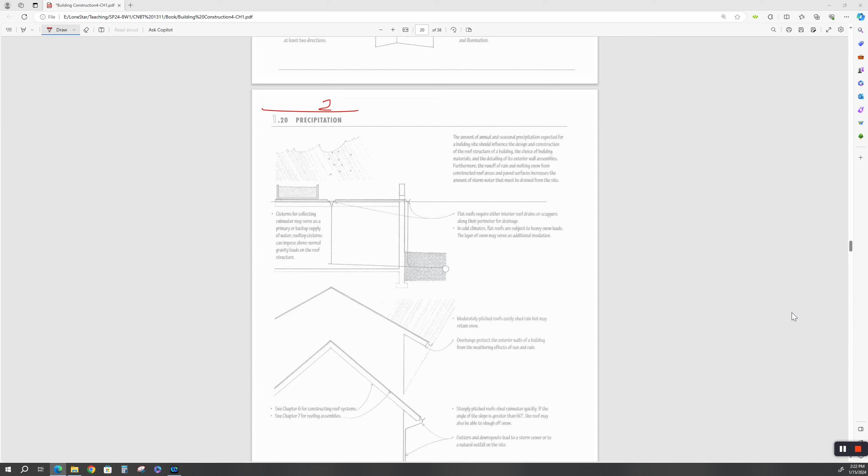Hello, CNBT 1311 again. This is part 2 of the chapter 1 video walkthrough. We left off with precipitation. If you'll remember in chapter 1.1, we talked about lighting, and left off with direct lighting coming into a house, bouncing off the walls and stuff like that. All right, let's go over here to precipitation.

Precipitation is rain, and we get a lot of that down here on the Gulf Coast, as you well know. So what you do with it is very, very important.

A poorly designed structure, a poorly designed site that does not take into consideration rain runoff, you're just asking to be sued. I did the forensic engineering on a building that collapsed due to water ponding.

The roof drains up here were clogged up. The maintenance people did not go up there and make sure they were free flowing. And sure enough, we got one of those 1.5 inch per hour rains for about 6 hours, and it basically turned the roof into a swimming pool, and it could take no more. The structural system bowed and bent to the point that it pulled the joist off the columns, and the roof collapsed. It was a big mess.

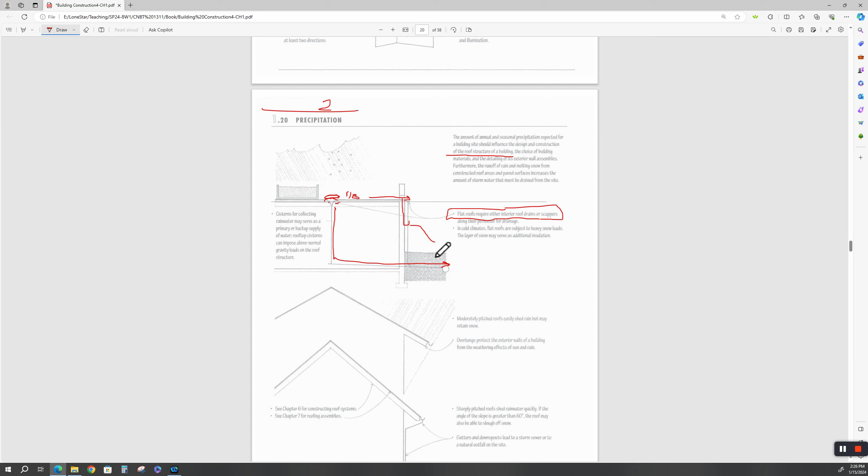So in case you do have blocked roof drains, before it gets to the point that it's overloading your roof structure, you'll have an emergency overflow that comes out. A lot of buildings will have these where they come out and they've got a spout, a spigot. So anytime you see water when it's raining coming out a wall through a spigot, then you know your roof drains up here are clogged up.

All right. So now, in the older buildings downtown Houston, they used to have a lot of these roof cisterns for collecting rainwater, and they would serve as what Ching says here is a primary or backup. They would treat them, they would treat the water.

They can also use it to water the landscaping around the structure. A lot of the old buildings in downtown Houston used to have roof cisterns.

A lot of houses out in the rural parts of the world have underground cisterns or above ground cisterns. I have a friend that's got some property out in the hill country. They don't get much rainwater, and he's got a tank, and the water comes off his roof and it collects in this giant 2,000-gallon tank.

So when he goes up there on the weekend, he's got rainwater, and they treat it. It goes to a small in-house treatment system, and if he needs to, he can buy water and have it trucked in and fill it up.

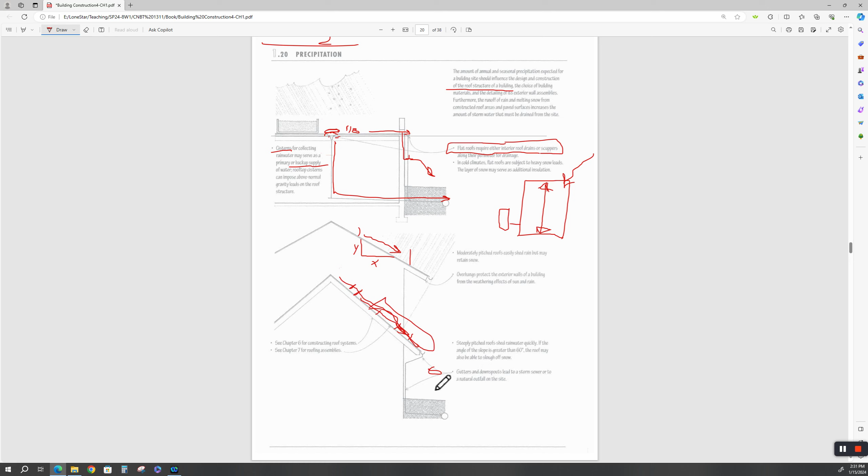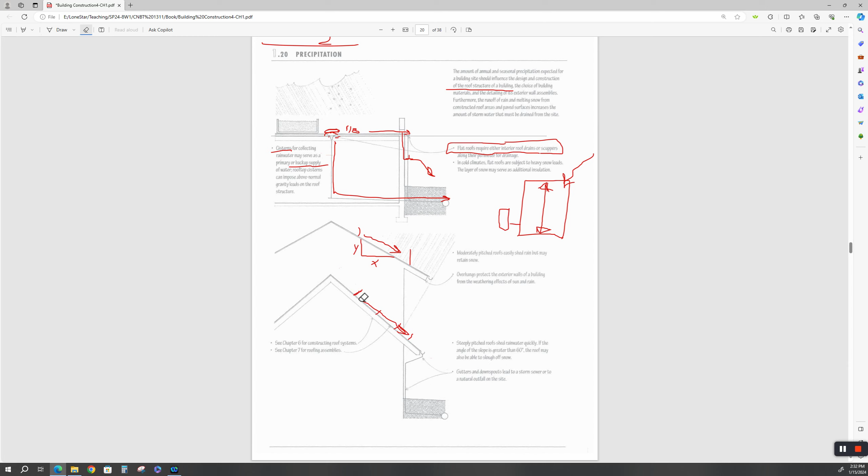All right, well, we'll resurrect this person after we've done them dirty. Okay, all right. So that's the point here, is that you got to look at the slope of your roof and how steep. So if you're in a snow area, you'll have a building code and rules of thumb to follow there. Okay, all right.

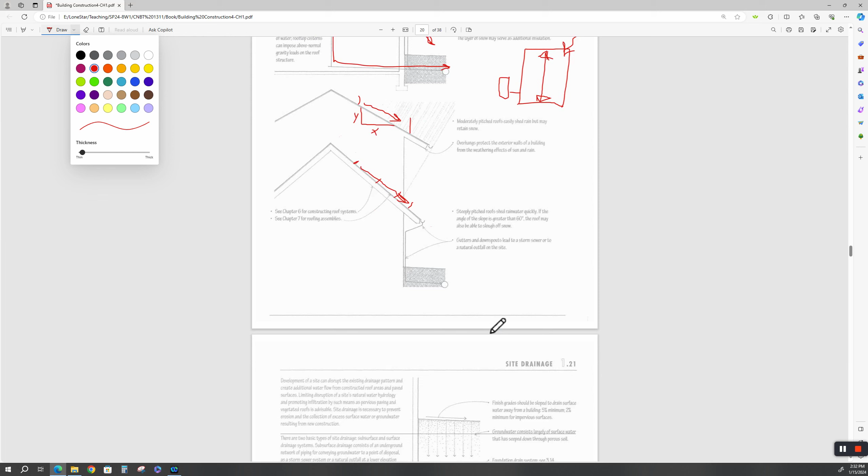And like down here, the size of these gutters, is it going to be a 3-inch gutter, 4-inch gutter, a 6-inch gutter? Okay, if the angle of the slope is greater than 60 degrees, the roof may also be able to slough off snow. Well, sloughing it off and holding it and then building up an ice sheet, if it's not insulated real well, can also give you problems. All right?

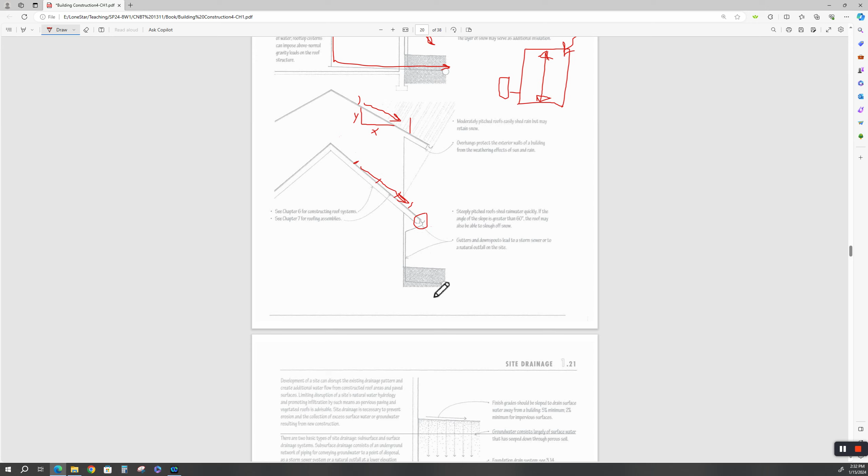All right, but all your downspouts and then your underground sewer system, if you're going to dump the rainwater in the sewer, has to be sized for the amount of runoff you're getting. Right, and that varies from area to area.

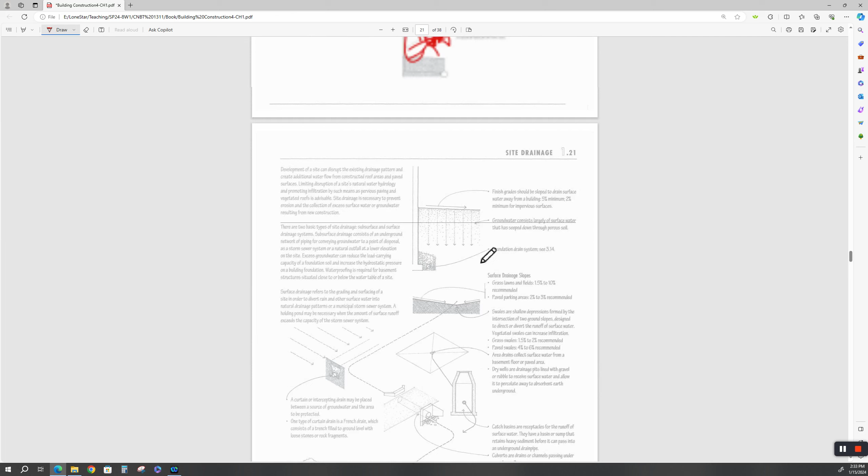Site drainage, this will get you sued if you're not careful. Where are we at over here? I'm going to watch my babbling. Oh, we're at 11 minutes. Okay, okay, I want to hold these to about 45 minutes.

Development of a site can disrupt the existing drainage pattern and create additional water flow. We already talked about this earlier in Chapter 1, about getting with Harris County Flood Control and getting a permit if you're going to develop a new site. You may have to dig a retention pond to hold some of that rain off because the bayous and creeks can't take it.

If you change the water flow on your property and it adversely affects your neighbor's property, you can get sued. It's against the law to do that, in Texas anyway.

Same with what you're building, and that's what Harris County Flood Control will look at. How much concrete are you putting down on a non-paved area? Are you putting down a parking lot? If you're going to develop the whole thing in a non-pervious covering, let's say you're putting in a little commercial building. You've got the building, you've got the pavement around it. This is going to equate to X amount of runoff. They may say part of your parking lot is going to be a retention pond, and you'll have to figure out how to park less cars.

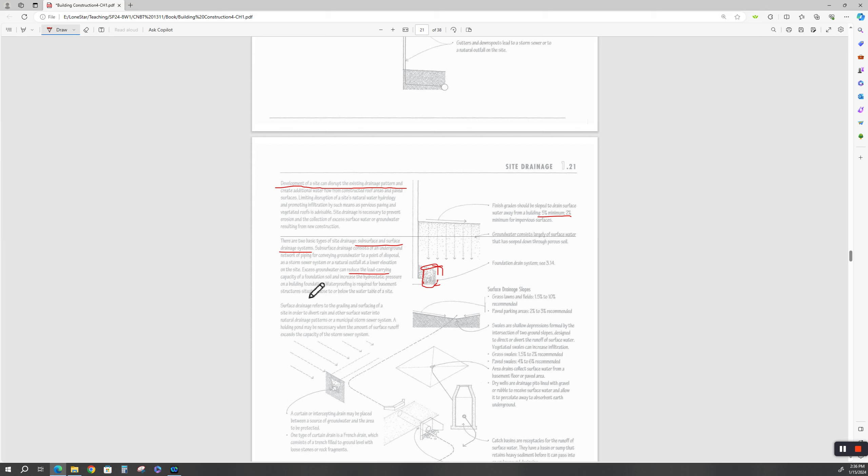You get too much groundwater, and yes, it can reduce the load carrying capacity of a foundation and soil. So again, that goes back to your soils engineer.

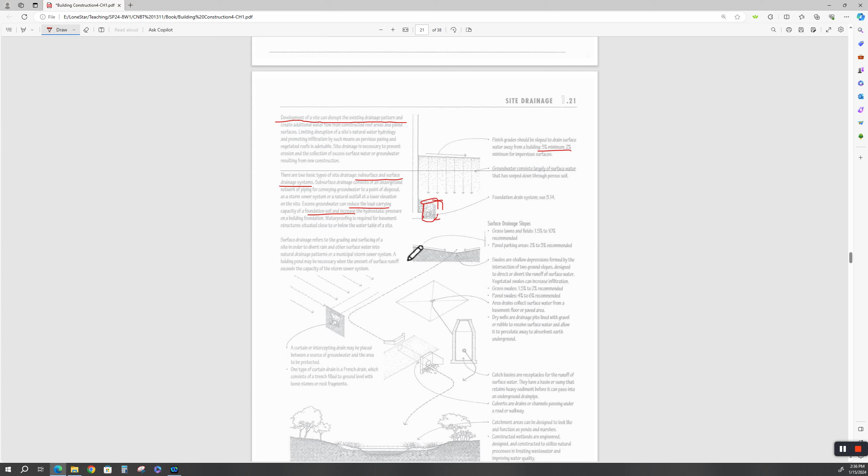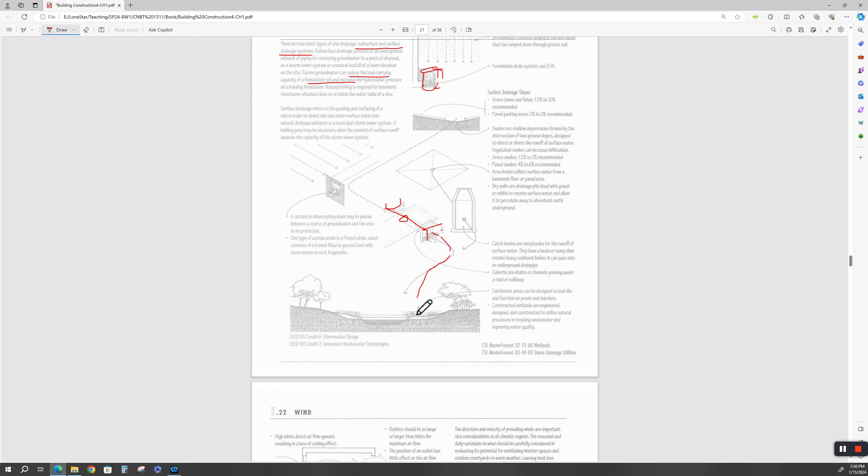Surface drainage refers to the grading. That's obvious. Area drains - down here in Houston, you will have a set of specs from City of Houston, Harris County, of the type of drains you're allowed to put in these public areas and roadways, whether it's a B-type inlet, a BB inlet, an E-type inlet, and that sort of thing, and the size of the RCP, reinforced concrete pipe. Here's a head wall - that's called a head wall. And the water would go through there and dump out into the creek or the water retention area.

Wind - we talked about wind, we talked about passive architecture stuff. Caudill Rowlett Scott, they had an elementary school that was basically a long shoebox, and they would have a high window over here on the leeward side. The leeward side of the building, College Station, back then before it was developed as much as it was - that's the leeward side, okay? And this is the windward side, where the wind predominantly comes from.

Wind side. So the air would flow through here and then rise up across and go out a smaller opening on the lee side of the school. And it increased the velocity of the air, and it helped keep air flowing in here.

And they did some high-tech insulation back then, as high-tech as they could. The foam technology hadn't been developed as well as it is today. We have some excellent insulating foams now that are not formaldehyde based. They don't produce cancer, and when they burn, if they get hot enough, they basically throw off water vapor. So anyhow, as long as it's installed properly.

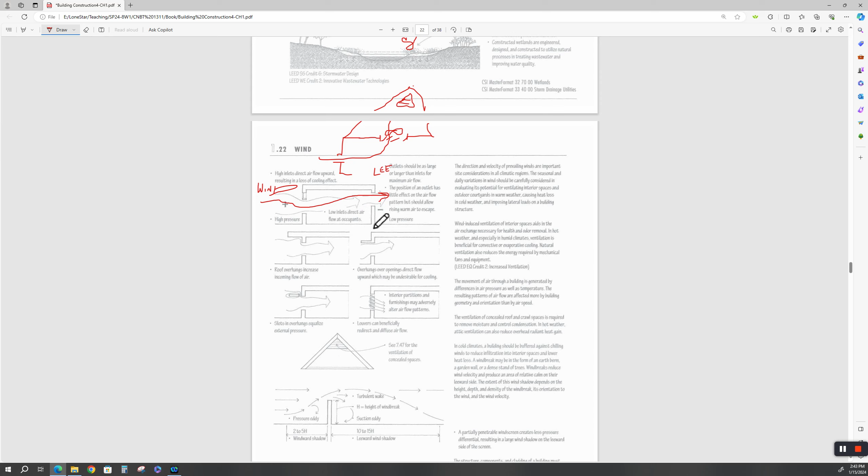Remember windward, remember leeward, wind shadow - I love it. You're out sailing and you say 'wind shadow,' you're going to get thrown off the sailboat. It's the windward side or the leeward side.

So what they're talking about here is the suction part, a pressure eddy. Right before all this air comes up over this, you're going to have some of this air that comes down and spins around, and the same on the inside - it's going to want to go to the path of least resistance. This is like an example of high wind breaks, which he talks about up here. It could be an earth berm, could be trees, could be anything to block the wind.

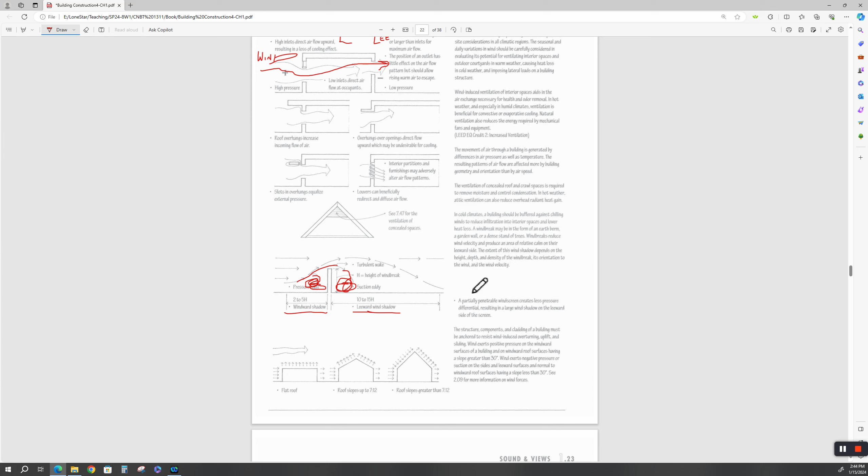So that's assuming you can orient your site to your wind. We talked about that in our site development, did we not?

Structure components - here's a pet peeve of mine. Most people don't understand how air works. Let's say the wind's coming across here. You got high pressure on this side of the wall - the wind's pushing it. You got low pressure over here. That's how a Marconi sail works on a sailboat, or an airplane wing - the air flows over the foil shape and you produce low pressure and high pressure, and it sucks you into the low pressure.

So in this case, you have wind coming across here, and let's say there's a tornado - got super high wind, or it could be a hurricane. Here's the Wicked Witch of the West on her bicycle, and poor Toto is back here trying to escape. You got high pressure on this side of the flat wall, and low pressure trying to suck the wall out - this is trying to push the wall in. And guess what happens on the roof? It's trying to lift the roof up, trying to suck the roof up.

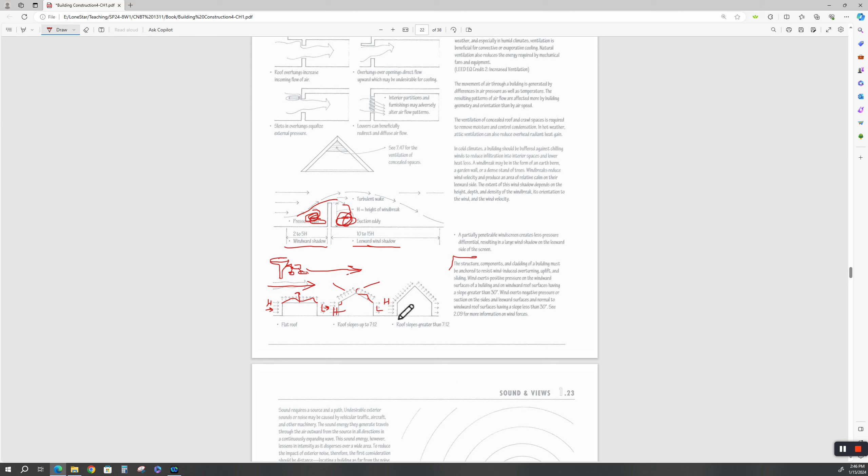Now what about super steep roofs? It makes sense, right? If this is high pressure, and the steeper the roof gets, the more vertical this gets based on its run, you're going to have high pressure up here too. It's going to be trying to push it in, and on this side you're going to have low pressure because the wind's going to come across here. It's going to be mounding up, it's going to hit this, it's going to come up over, and then it's just like an airplane wing. It's going to be pushing, and then over here it's going to be sucking, same way on the wall. Depending on the velocity, it'll start to collapse, and underneath here will be a very low pressure eddy. It'll be sucking it this way.

I'm not expecting y'all to be engineers, or to be as excited and geeky as I am over this kind of stuff. But trust me, you screw your wind loading up on a structure, there's another place for a lawsuit.

Again, remember the three little pigs. The last heavy brick house, the wolf couldn't huff and puff and blow their house in.

So everything on that building, Ching talks about it in here. He talks about the cladding and all this other stuff. What does he say about wind effects? Negative pressure or suction on the sides and leeward surfaces and normal. These are also in your building codes, depending on what part of the universe you're from.

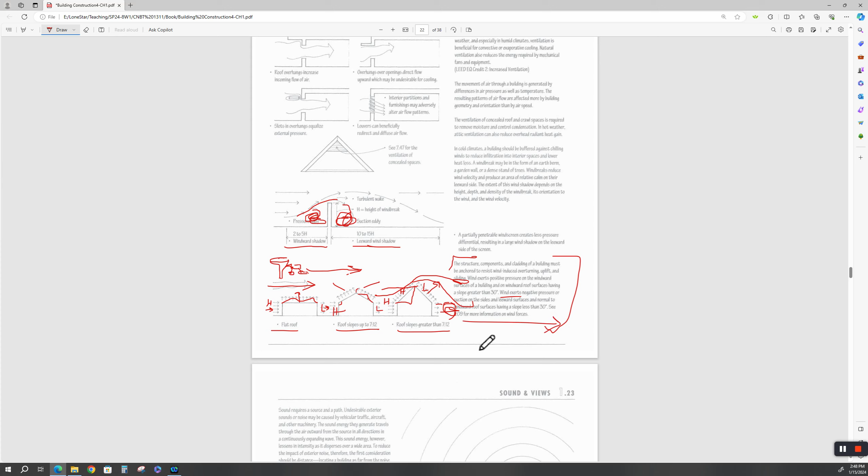Now if you're up in Tornado Alley, up in Kansas and stuff like that, oh my God, yeah, you can do whatever you want. About the best thing you can do for a tornado-resistant structure is a monolithic dome. You can go Google Texas domes, monolithic domes. They're up in Italy, Texas, off I-35, before you get to the Fort Worth, Dallas area, between Waco and that area. They're foam structured and concrete domes. They'll survive a tornado when nothing else will.

And you know, it makes sense, right? All right, now how about sound? How are we doing on time? Oh my God, we're 27 minutes. We're just looking at megabytes. 27 minutes, okay, we're fine.

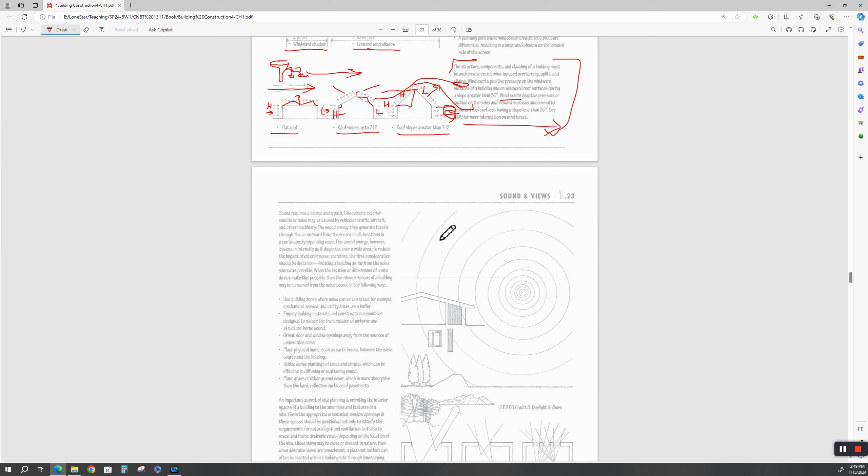All right, sound and views. Depending on the windows in the house, the type of material the house is built out of, everything has a resonance frequency of its own, a hysteresis value. How easy does it transmit vibration? And that's what sound is, vibration.

Read through this, y'all read through all of this, I'm not going to bore you and read this to you. If you can orient your building so that the solid walls are facing the most noisy part of the road or highway near the structure, well yeah, then you'll let that solid wall help abate some of that sound and noise.

You use double pane insulated windows that are foam filled, the frames, the right kind of insulation and the right kind of building material, masonry and good foam for your insulation will certainly abate the noise. The doors, what are the doors made out of? Are they solid core foamed structural doors, or are they just el cheapo hollow fiberglass exterior doors? If that's the case, then they're going to transmit more noise.

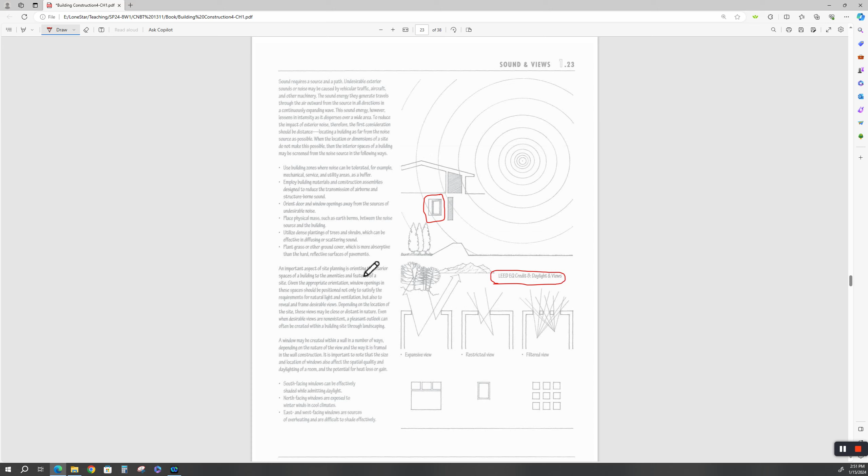And all these LEED credits are part of that LEED thing. Don't forget what LEED stands for. You're going to have the book anyway when you take the test, and if I ask a question, what's LEED? Well, you can either Google it or go to that section of the textbook, right? Again, we're not here to beat you up, we're here to get you through this vocabulary so that you can move on with your architectural design path.

A window may be created within a wall in a number of ways. Well no kidding, I've put windows in walls that were solid. I took a chainsaw and cut the opening and then reframed it for the contractor I was working for, because the architect wanted a window and he forgot to put it on the plans. That was fun.

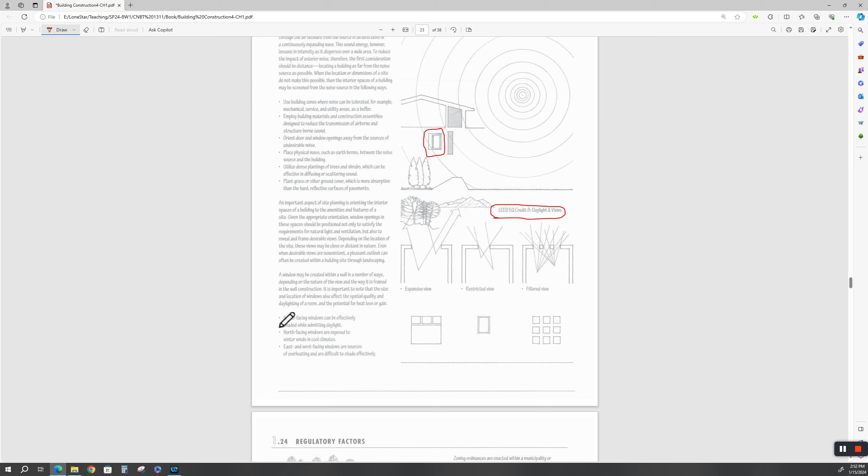Windows, how you frame them, what they're made out of, all of this affects things. Here's some good rules of thumb: south-facing windows can effectively shade. Your north-facing windows are exposed to winter winds and cool climates.

But painters, sketchers, artists, and natural light photographers like the north lighting because it's the softest light, as they say.

East and west facing windows are sources of overheating and are difficult to shade effectively. Well, that makes sense, doesn't it? Because where does the sun come up? It comes up in the east and sets in the west.

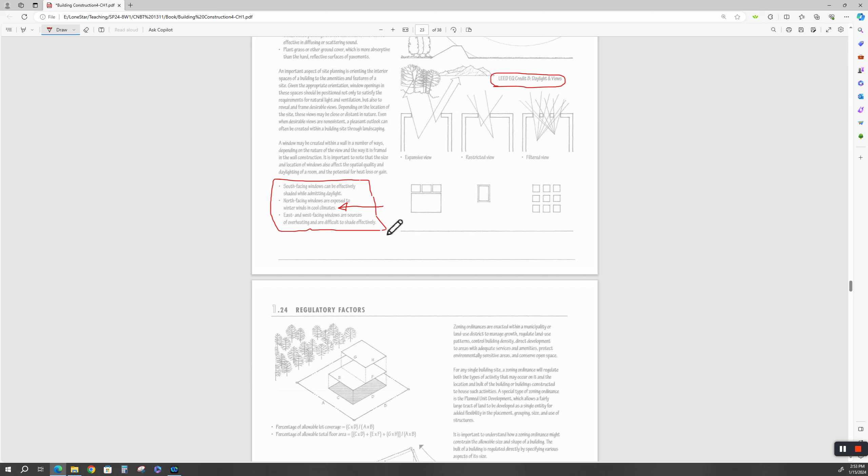So if you've got a shoebox shaped structure, you can orient it so that the smaller sides are facing east and west. Then you've reduced the heat load on two sides of your building.

Regulatory factors - we already talked about topography and flood control. Well, guess what? There is a plethora of ordinances and building codes and zoning codes that you have to adhere to. And depending on where you are in the United States, or even in Texas, you may have a zoning ordinance that will or will not let you do certain things.

Your deeds and covenants, your homeowner's restrictions - let's say 51% of the first floor, or 51% of the structure, has to be masonry, or something like that. Some say the outer facing, the back of the house, can be siding, but the front two sides have to be brick. Some say the whole first floor has to be wrapped in masonry.

This talks about how your mileage is going to vary. Do not use this as a hard and fast thing. You need to check your local code, your building code, your property code.

And if you're building a building inside something, like say the Vintage over off of Louetta and 249, if you're going to put a pad site in over there, I guarantee you that developer is going to have certain restrictions on what they want it to look like and not look like.

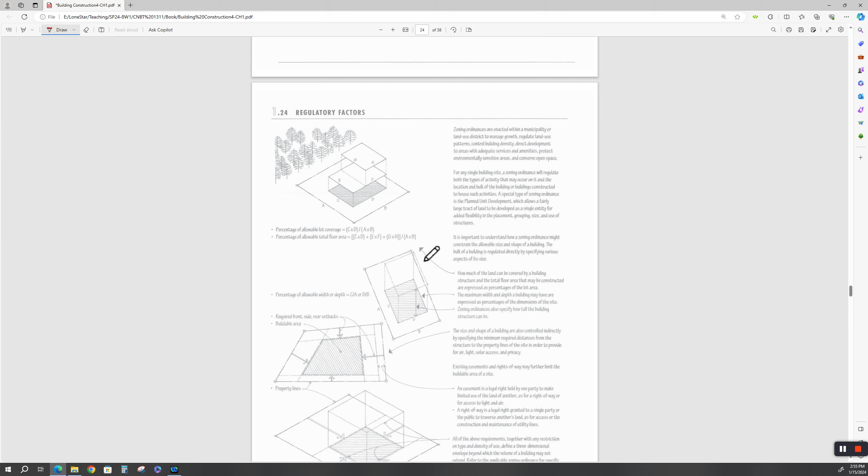Then you have to have the Harris County Engineering Code, your fire code, your plumbing code, and whatever other codes are going to be impacting your deal. Sometimes you'll have a height restriction.

A square footage restriction - so let's just say this is your building, your site, your property lines. Well, you can't put everything on that property. You've got required setbacks, and not only do you have required setbacks, you'll also have easements in here. This may be an overhead HL&P easement that you can't build anything underneath.

You may have Entex - I just dated myself, that's for natural gas. Then AT&T has their buried cables back in here, that's underground. And then Billy Bob's pipeline or something. So all of this should be on your plat.

This should be on your deed, your metes and bounds, which your surveyor should give you, your licensed surveyor. And so let's just say the deed restrictions say you have to have a minimum of 3,000 square feet - not 300 square feet, that'd be like a fifth wheel.

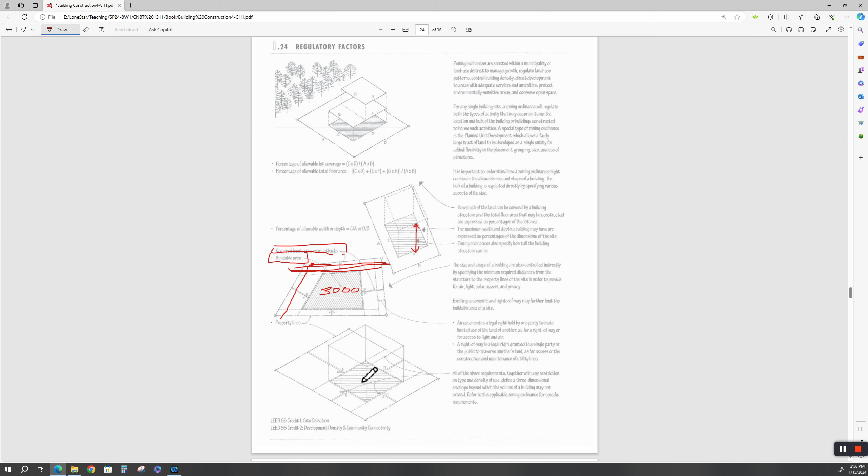And then some deed restrictions will say two-story structures must have a minimum of X amount of square feet on the bottom floor and a minimum of so many square feet on the top floor, and it may not be the same. So you might be able to get by with a story and a half or a full two-story.

Again, now you're forced to build a cube. But I wanted to make some architectural statement. Well, then make an architectural statement with your cube, because you're stuck like Chuck.

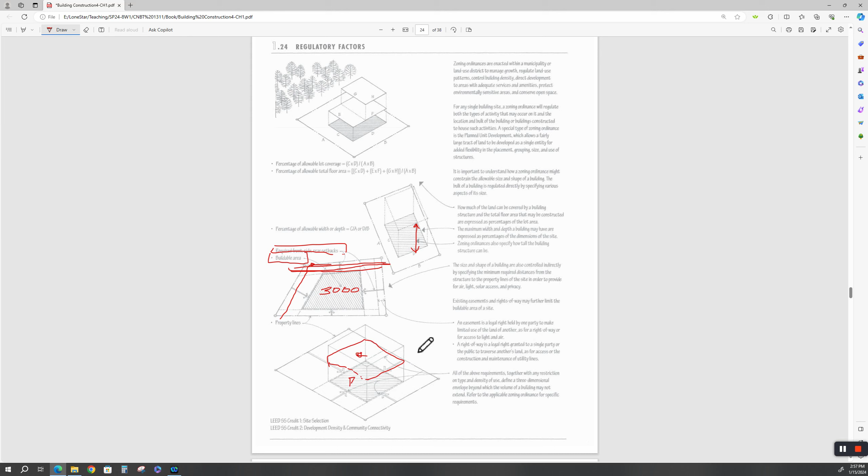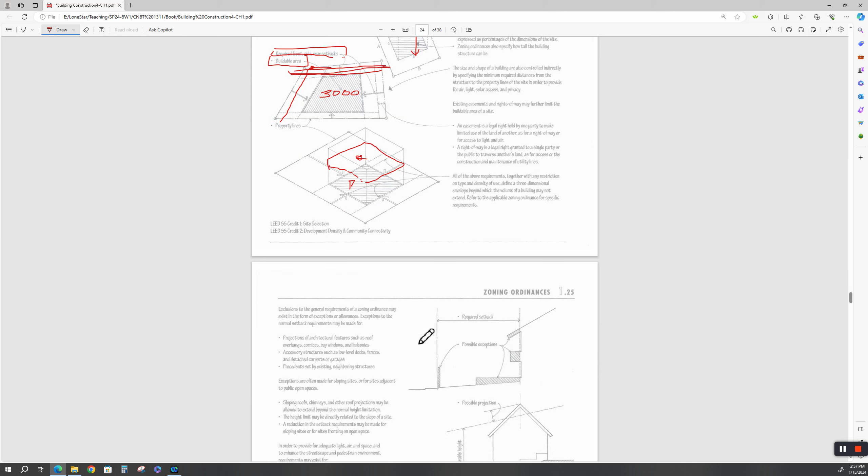Again, what did I say in the first video? It depends on how big your site is and what you're going to do with it. I mean, they're not going to let you put in a petrochemical refinery plant inside a subdivision. You're going to have to go to a place that can support that.

Zoning ordinances - we already talked about that. Possible projections of your zoning ordinance. This talks all about your exclusions to the general requirements of the zoning ordinance.

If you're up in super snow country, I bet you my bottom dollar they're going to have an ordinance or a design. The insurance companies will have a code, and they're going to want you to design that structure for the snow loading and the other stuff. We talked about allowances for heights. This talks about it here. And you thought I was making that up.

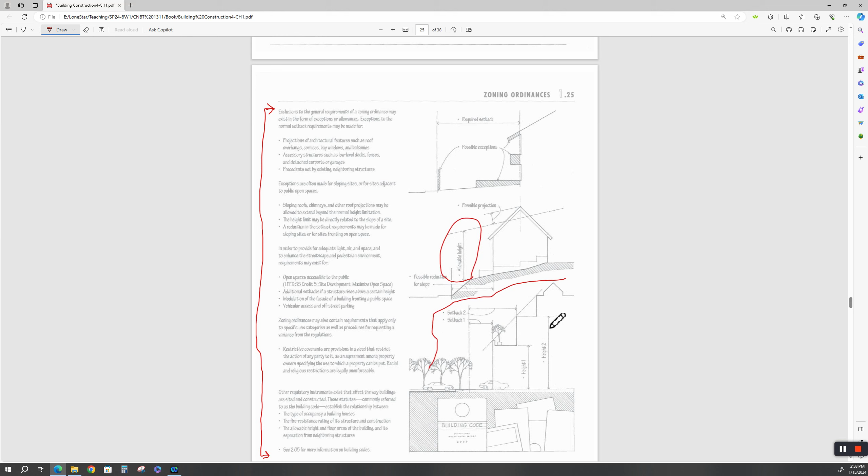All right, setback 1 can be this height, setback 2 can be that height, and there may be another setback that can be a different height. Again, these are your restrictive covenants and your zoning ordinances, and some of them even refer you back to all those LEED things. Your mileage is going to vary.

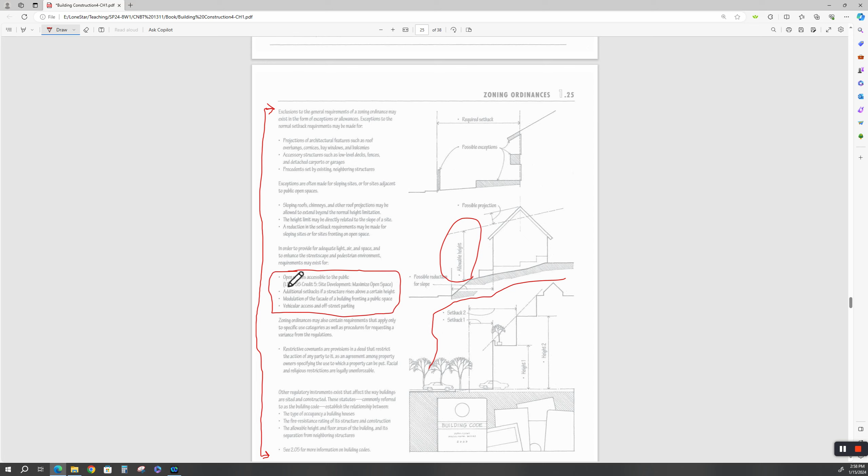Again, this is a survey course. This is to get you into what is out there, lurking in the darkness.

Site access and circulation - this is where people get into a lot of trouble. What do we mean by that? Providing for access and circulation for pedestrians, automobiles, and service vehicles is an important aspect of site planning. Now, your emergency vehicles are also service vehicles. You've seen a lot of these red painted stripes around these parking lots - it's fire zone, tow-away, you can't park here, and that sort of thing.

Big thing is, what's the population density? Let's say this is a commercial building - how many people are you going to have here, plus your employees? Where are they going to park their cars? Do you have enough room for a parking lot?

The Vintage Park Shopping Center is a quaint little place of all kinds of stuff over off of Louetta and 249. And it is a prime example of some of the poorest design parking on the planet. Sometimes it's hard to find a parking spot over there. You're not going to find it near those drive-up facilities most of the time. You've got to park out in the big parking lot out in the South 40 and then walk, which is not bad. But my whole point is that, yes, it's quaint, and yes, there's parking in front of these shops, but it's very limited in front of the shop.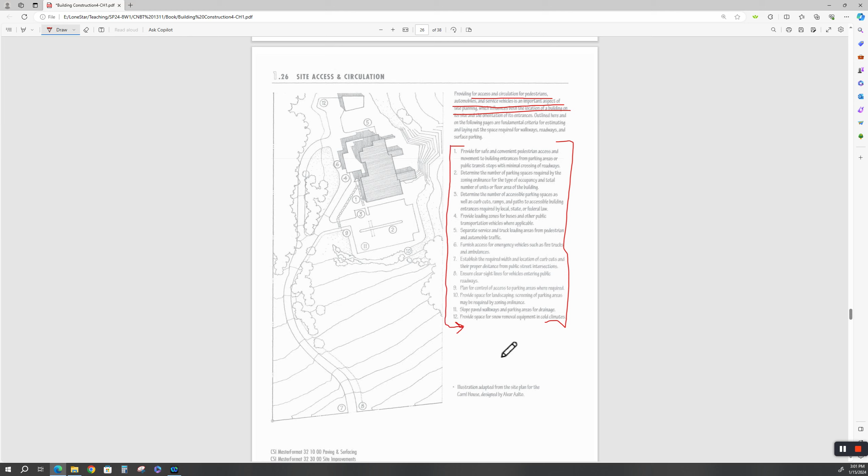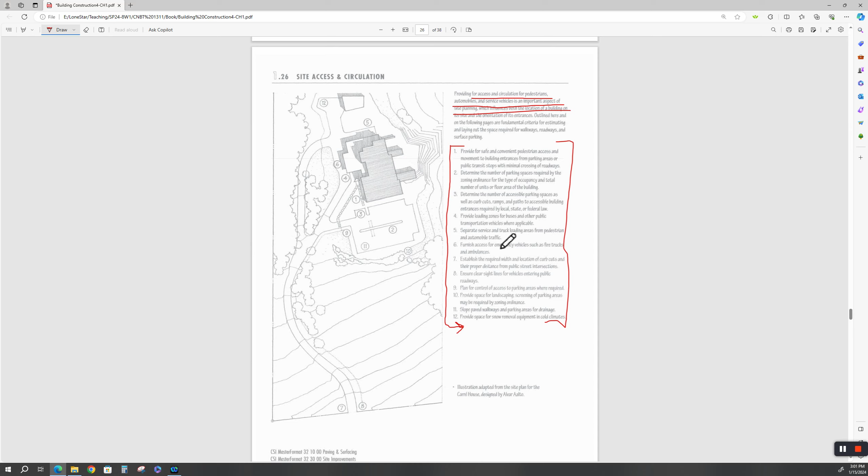Let's say this was a medical facility. Most of your employees would probably try to park back in here or something. But then again, what about service people? And that talks about that all in here. We beat that up enough.

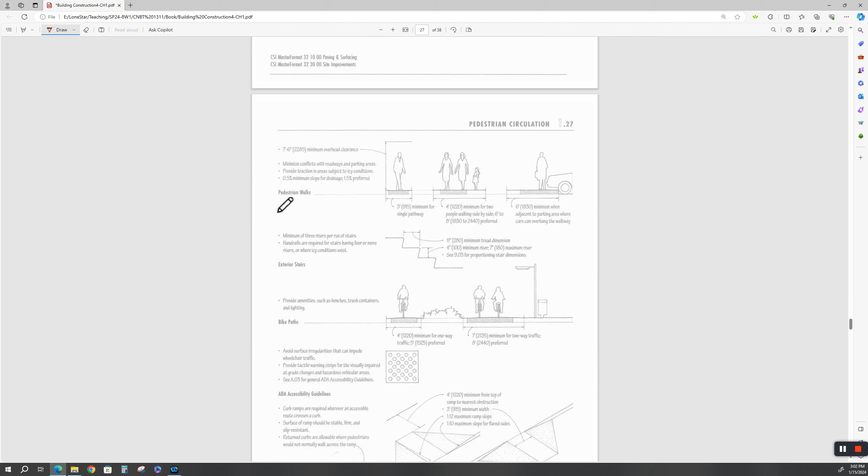Here is a good part of human factors - pedestrian circulation. 3 foot minimum for one person, 4 foot for two. That's a little too crowded for me, but I'm kind of a socially unacceptable person anyway. Side by side is really 6 to 8 feet. And then if you're going to have somebody walk and you've got these cars hanging over, another 6 feet. Again, this is a rule of thumb.

Now, exterior stairs - stairs will get you sued if you screw these up. And we'll have a whole section on stairs. You'll probably hate me by the time we get done with stairs. But minimum of 3 risers per run. Handrails are required for stairs having 4 or more risers, or where icy conditions exist.

And bike paths - again, these are rules of thumb. You may have a zoning requirement or a building code requirement in a certain area that requires something more. Seriously, when we get to stairs, y'all pay attention. We'll have some stair calculations if we can fit it in. If it was a face-to-face 16-week class, you'd be doing stair calculations a lot.

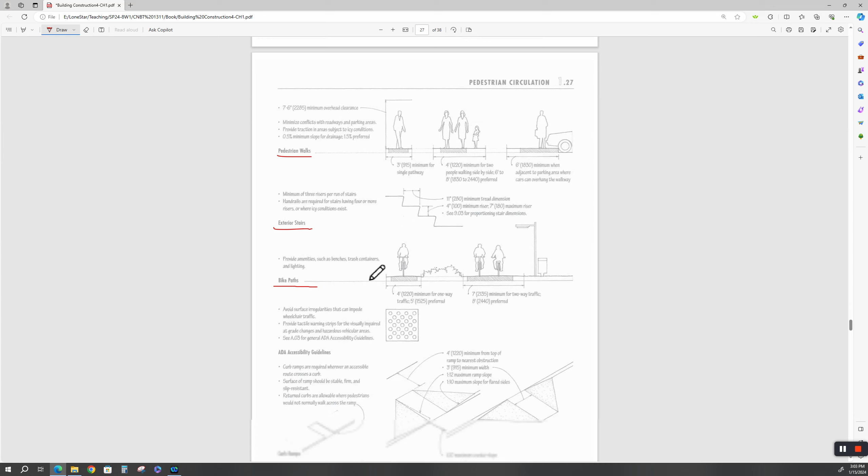That's vertical movement of a human, and how you get them to move and get them up. Those of you taking face-to-face classes out at the Cypress Center, go look at all the different stairs we've got—that big Mayan sacrificial staircase right by the cop desk, and the other two stairs on the end.

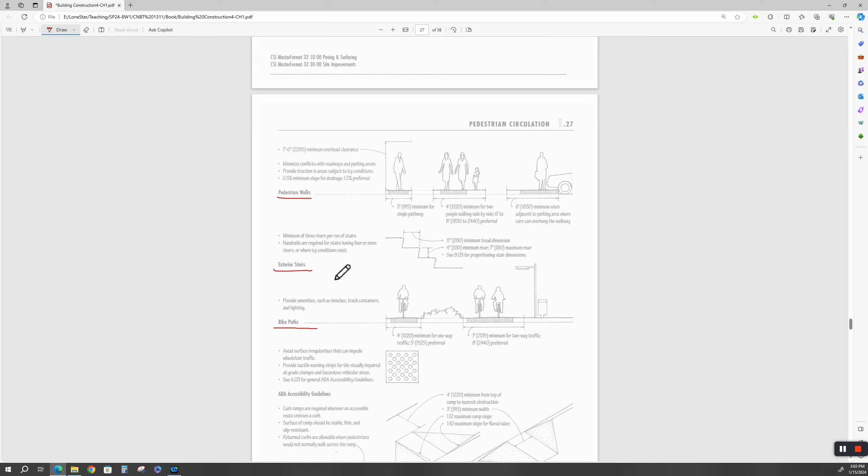Avoid surface irregularities that can impede wheelchair traffic. That's part of the ADA thing, and there's a whole section on ADA later on. ADA is the Americans with Disabilities Act, and there's a whole section of human factors on designing around ADA.

When I remodeled my bathroom at the house, I made sure that I could get a walker and a wheelchair back into the bathroom. With my two knee replacements and my back surgery, I was using a walker for a while. We were glad that we did that.

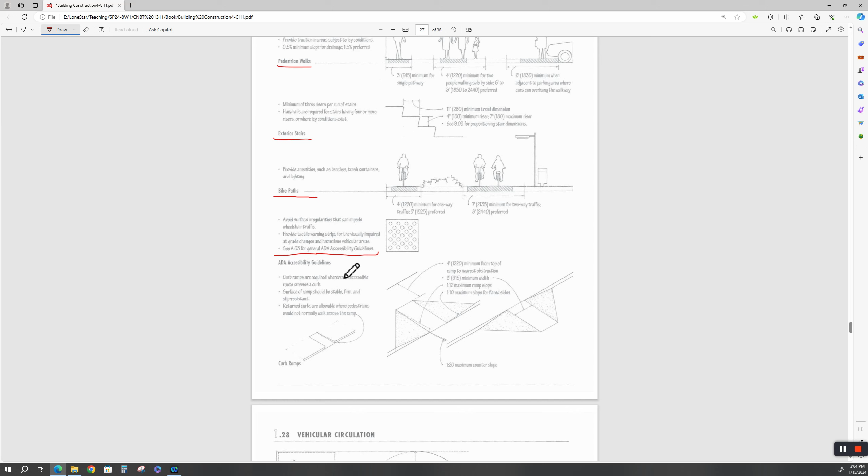Curb ramps. If you're going to have ADA access to a doorway in a building, you need some kind of wheelchair curb ramp.

You need to have the buttons where they can get to them, not out in the flower bed like at the Cypress Center main opening. They had ADA ramps going in, but the ADA button on the exterior was 3 feet out in the flower bed. Since I opened that center as the director, that was one of my first pet peeves. They had to go pour a slab out underneath the roof covering to get to the button. So the poor person in the wheelchair, if it's raining and they finally make it up, they have to go back out in the rain to push the button so the door opens. Go figure—not a very good design.

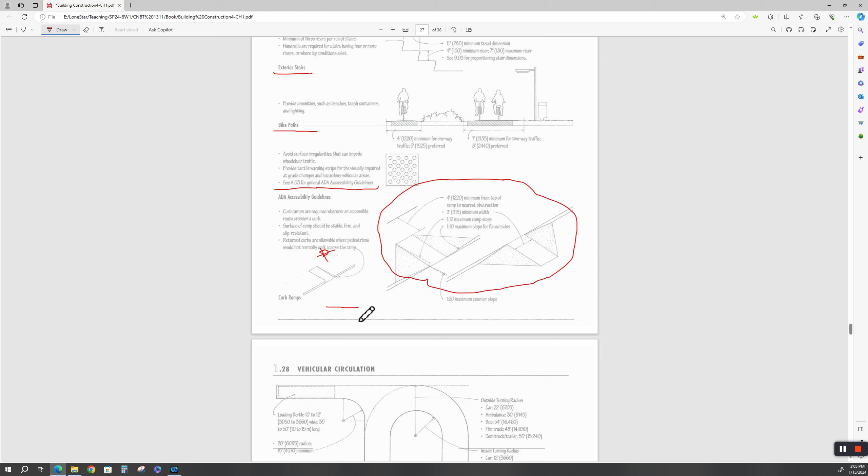All right, these are some rules of thumb for ramps. You don't want them so steep that people are out of control. A ramp is nothing more than a rise over a run—we go back to the right triangle again.

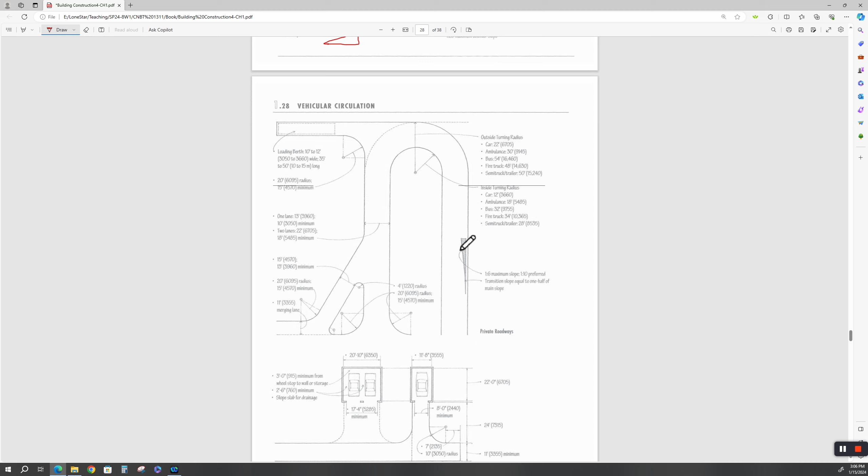Vehicular circulation—this is civil engineering. I'm not going to expect you to be a civil engineer, but trust me, parking lots—I have gotten into a lot of arguments with architects over parking lots and how to move cars around their structure. Sometimes they had to narrow their building to get the number of cars they needed in the spaces. These are some rules of thumb.

Again, these are rules of thumb. This loading berth, 10 to 12 feet wide and 35 to 50 feet long, with this radius, in my opinion, is too tight to expect a truck driver to get that in there.

Especially in this little slit here. A good truck driver can do it, but he's going to have to come in this way, get that thing jacked over to back in that way. So he may have to actually go against traffic, because having him come in this way and make that steep turnaround, he's going to need this.

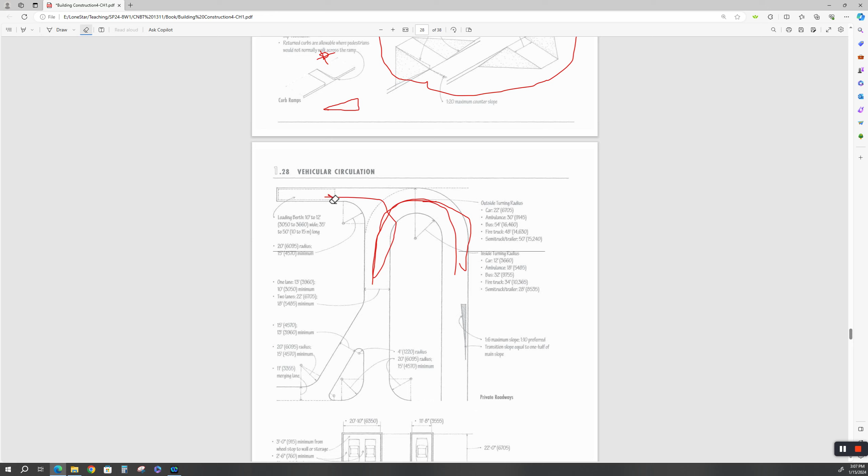These are all things you've got to consider. And I've had a lot of arguments with architects in my other life about this.

Parking lots—we already talked about the vintage parking lot. Now if it's just out in the middle of the pasture, like the big parking lots at the vintage, that's a no-brainer. They're pretty much double stacked, 90 degrees in. These get a little hinky.

Angled parking lots. Some sections of the high-rise parking garage at UP campus have angled parking slots, and you've got to watch your cross-flow traffic. You can get your cars backed in or headed in deep enough, and then get them out. But these are some rules of thumb.

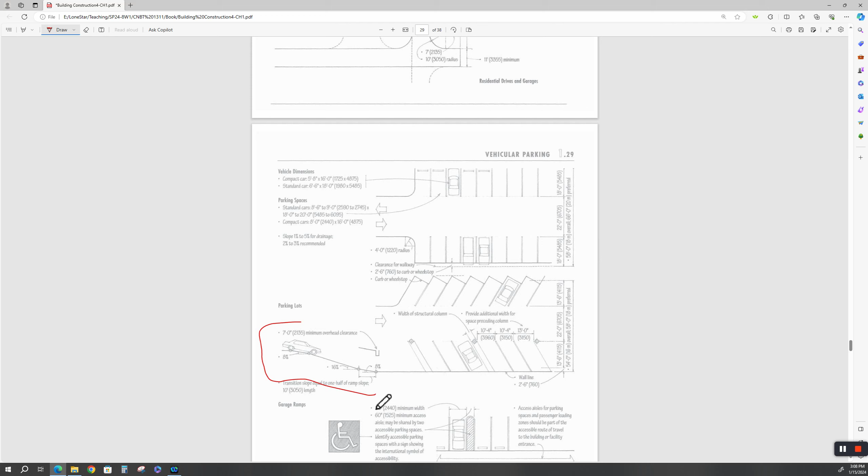Again, this is a ramp. You don't want the ramp too steep or the cars bottom out. And what is this? Well, that's a right triangle, isn't it? Yep, that's a right triangle. Look at that—that's a right triangle. Again, right triangle, and this is a right triangle. That's all slope is: rise over the run. You've got to get these angles right.

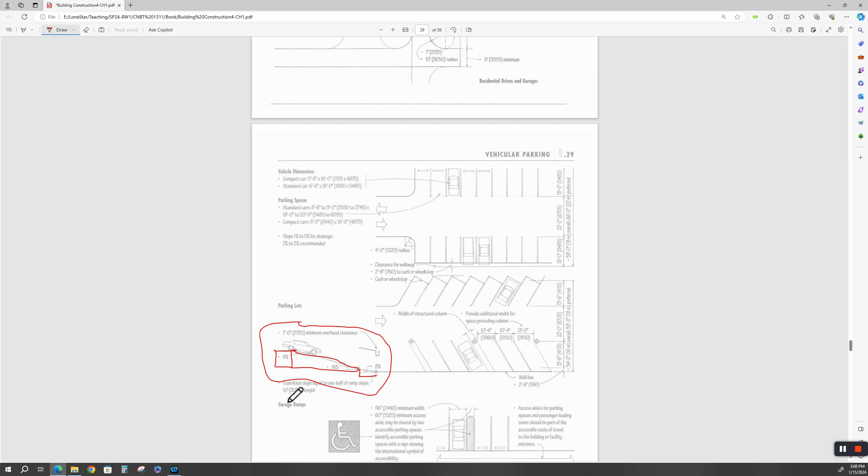Ching says transition slope equals one-half of the ramp slope. Okay, that's fine, that may work—it'll work for some cars. Now low riders need a more shallow ramp, right? But a standard vehicle—this is for standard vehicles.

ADA parking in garages for wheelchairs, accessibility—ADA accessibility guidelines.

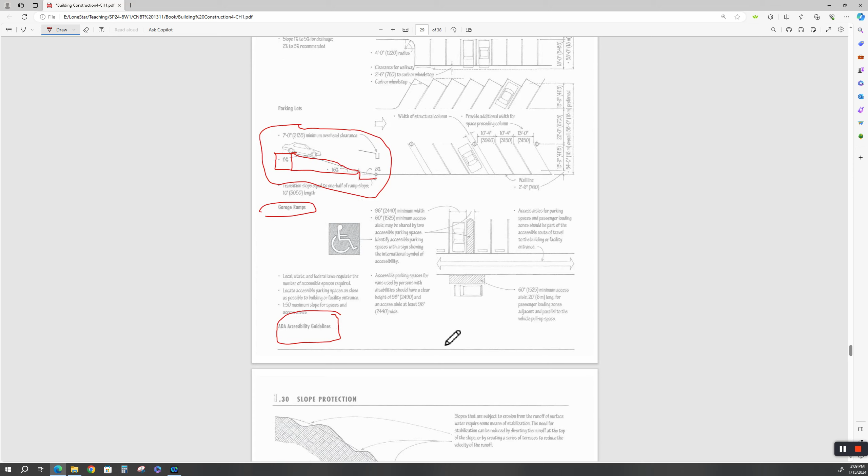Okay, where are we at? We're at 46 minutes. Oh my goodness, probably because I yapped too long.

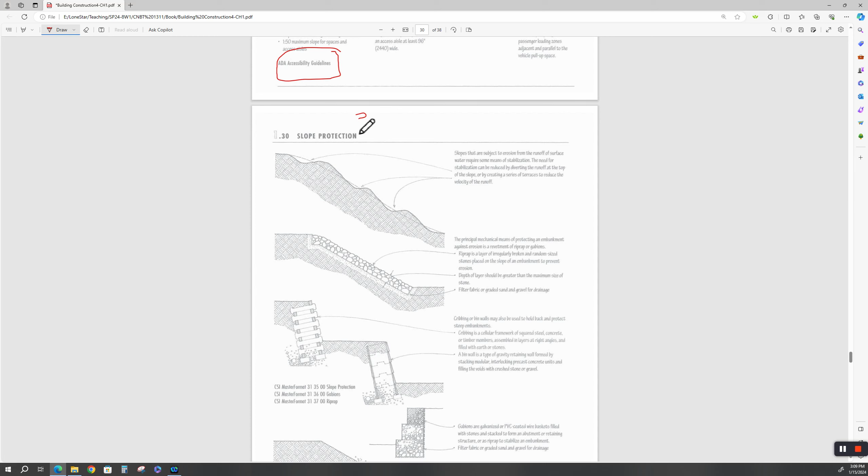We're at slope protection. I tell you what, we're going to do 3 videos for chapter 1. All right, we'll start off with slope protection on the 3rd. We'll start off with slope protection.